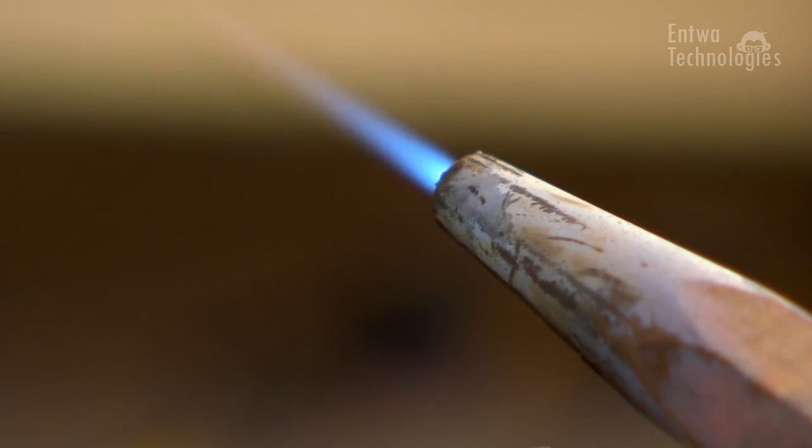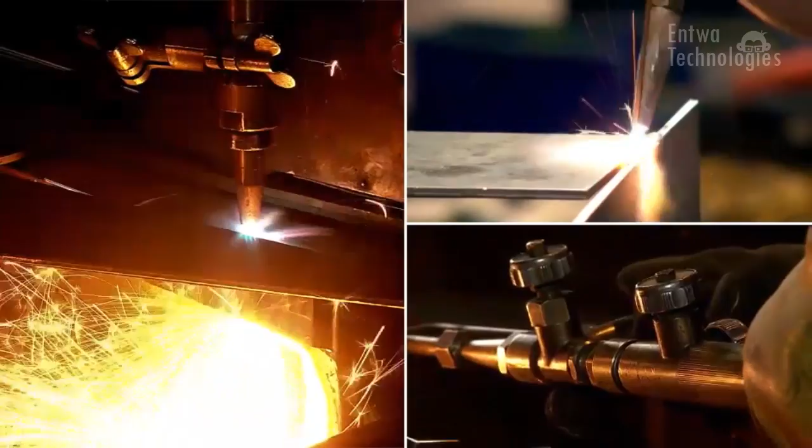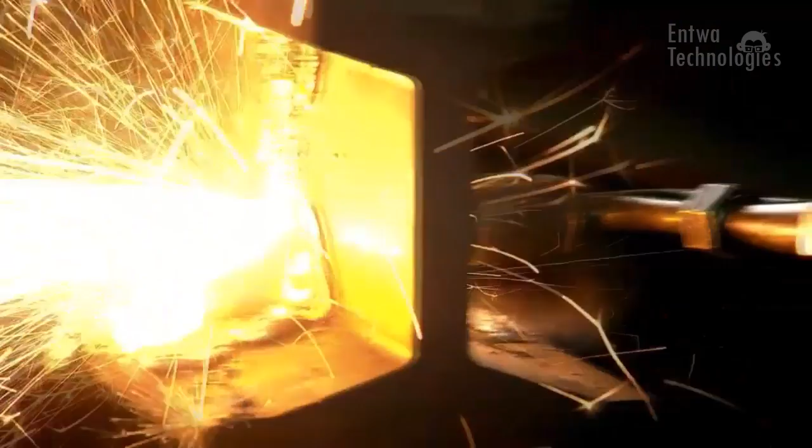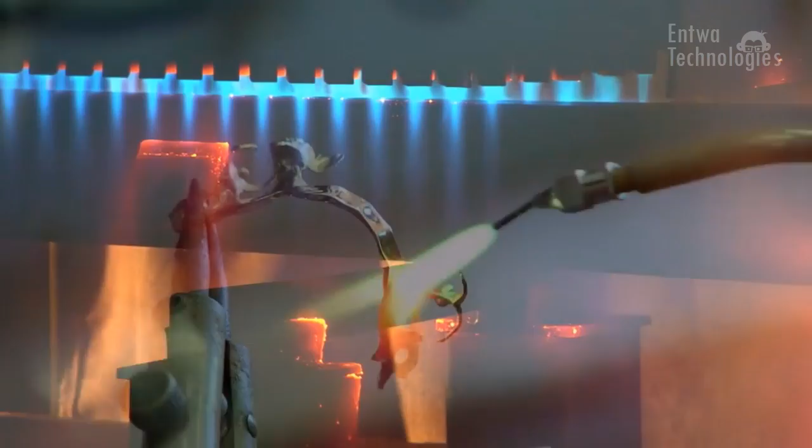Industrial gases used for industrial applications consist of flammable gases along with oxygen. This indispensable combination is used for applications such as welding and cutting, heating, forming, hardening or surface treatment, and for many such applications. Fuel gases such as acetylene and ethylene, propane and propylene, butane or methane or hydrogen mixed with oxygen have proven their value and are safe when handled correctly.

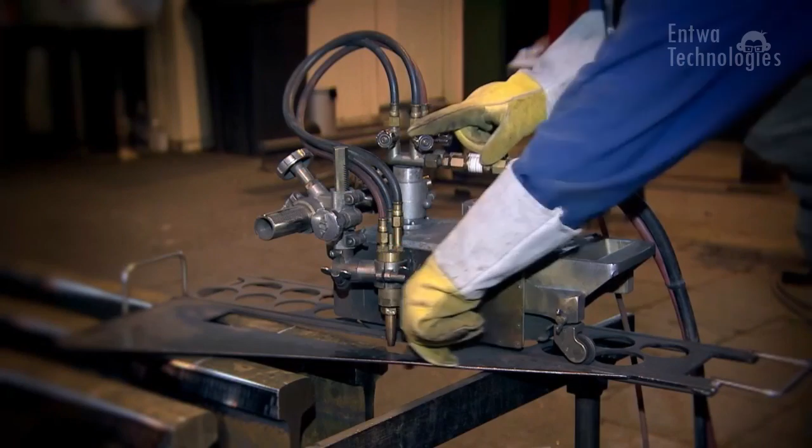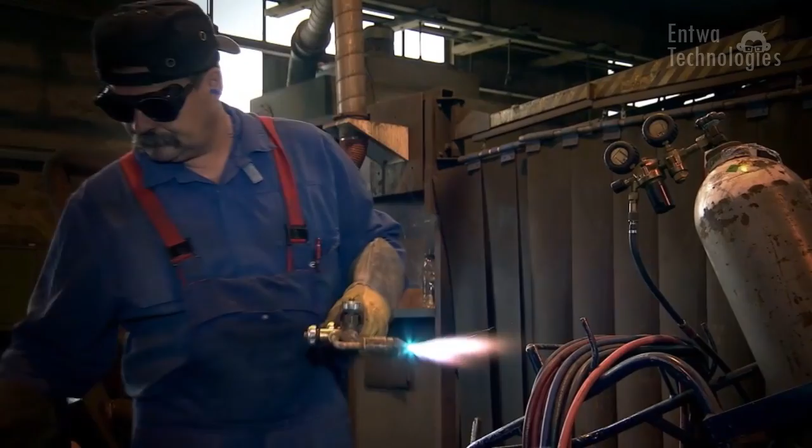However, if these gases are not handled properly, a dangerous situation can arise at any time, mainly due to faulty operations and human error, besides technical faults. For example, in the event of a flashback, the flame travels through the gas hose at twice the speed of sound, thus making it impossible to intervene manually and prevent the accident. The worst case scenario: explosion of the compressed gas cylinder or a gas tank.

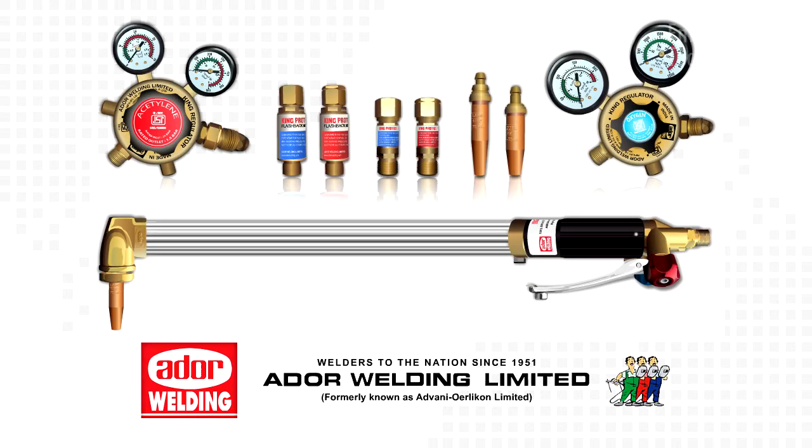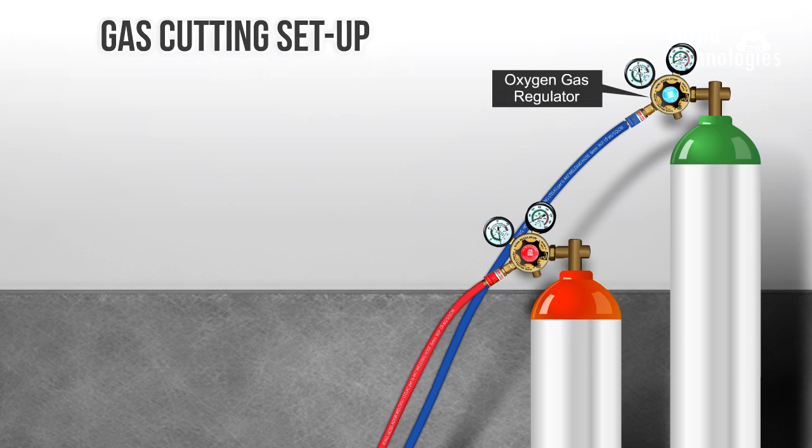Shown is a gas cutting setup with AWL's King series of products. It consists of 2 gas cylinders, one with oxygen and the other contains a fuel gas such as acetylene or LPG. There is an oxygen gas regulator and a fuel gas regulator paired with regulator mounted flashback arresters. The gas hoses for oxygen are demarcated by blue, while red color indicates fuel gas hose.

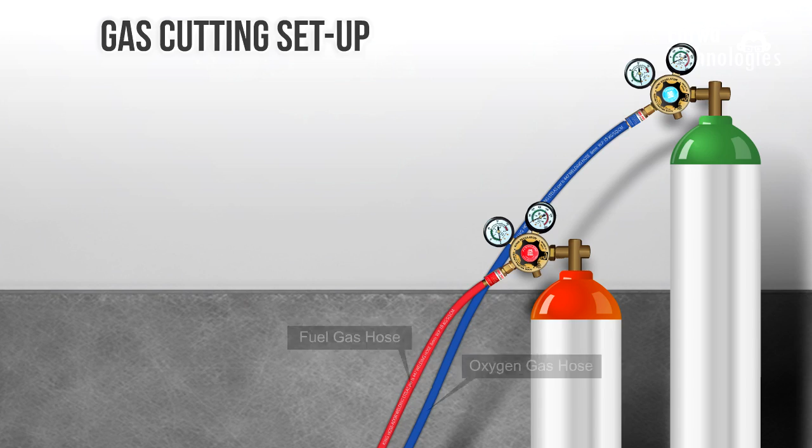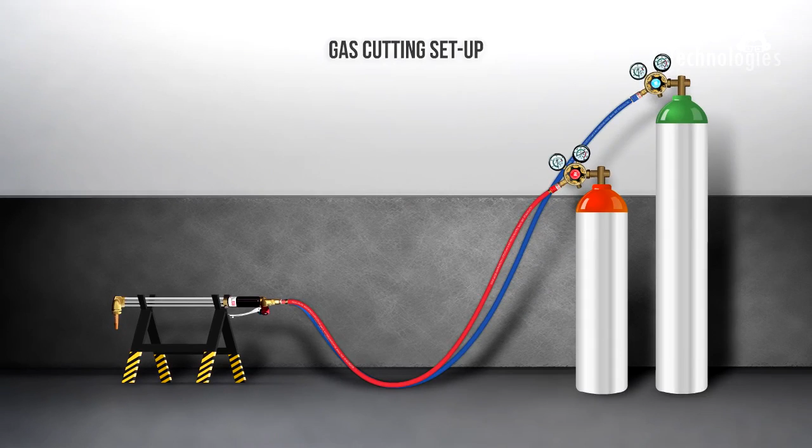This setup also consists of a pair of torch-mounted flashback arresters for both oxygen and fuel gas and also includes a gas-cutting torch. Let us understand in brief about AWL's King series of products with its unique features for enhanced safety.

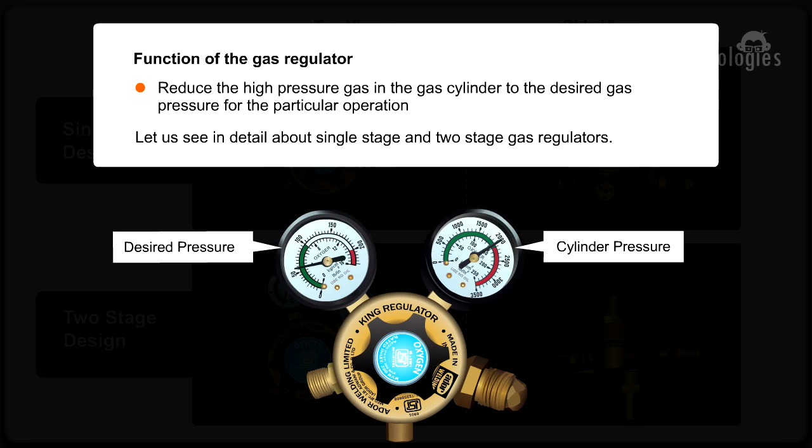An oxygen gas regulator, either of single-stage or 2-stage design, is fitted to an oxygen gas cylinder. Similarly, either acetylene or LPG gas regulator is fitted to the gas cylinder depending upon fuel gas used. The function of a gas regulator is to reduce the high pressure in the gas cylinder to the desired pressure for the particular operation. Let us now see in detail about single-stage and 2-stage gas regulators.

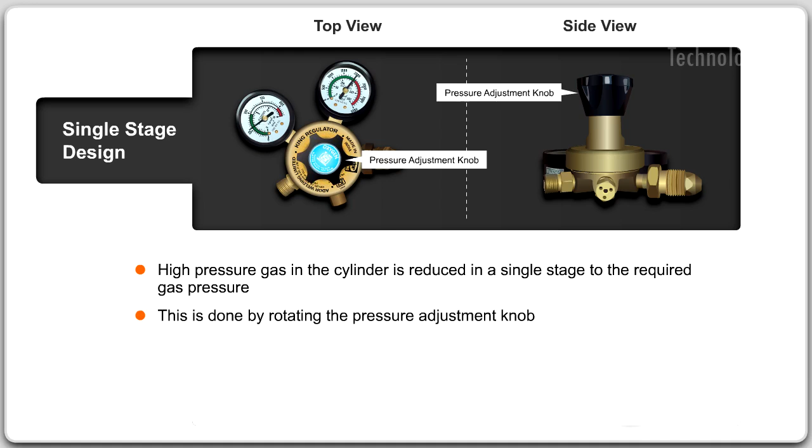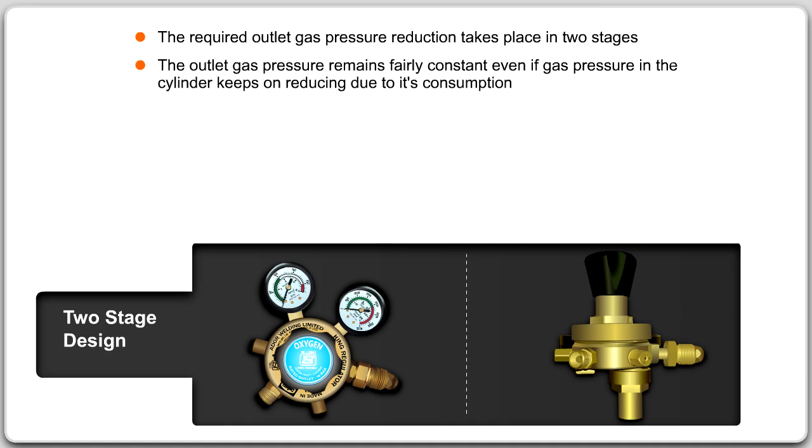In single-stage regulators, high pressure gas in the cylinder is reduced in a single stage to the required gas pressure. This is done by rotating the pressure adjustment knob. In two-stage gas regulators, the required outlet gas pressure reduction takes place in two stages. The outlet gas pressure remains fairly constant even if gas pressure in the cylinder keeps on reducing due to its consumption, as some amount of gas at fixed intermediate pressure is always available in the first stage of the regulator.

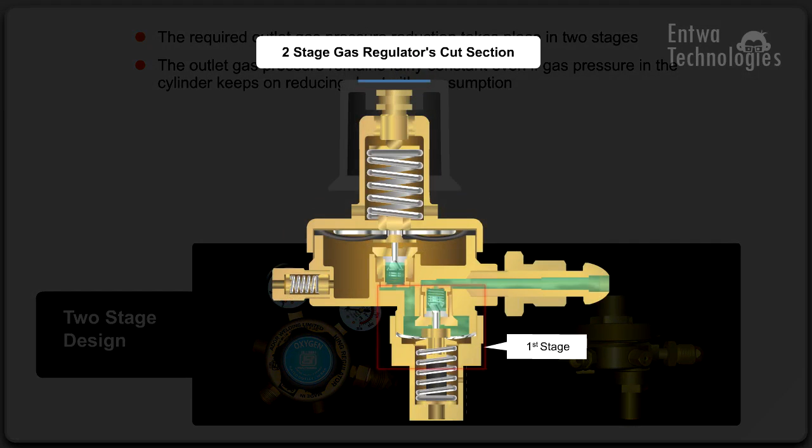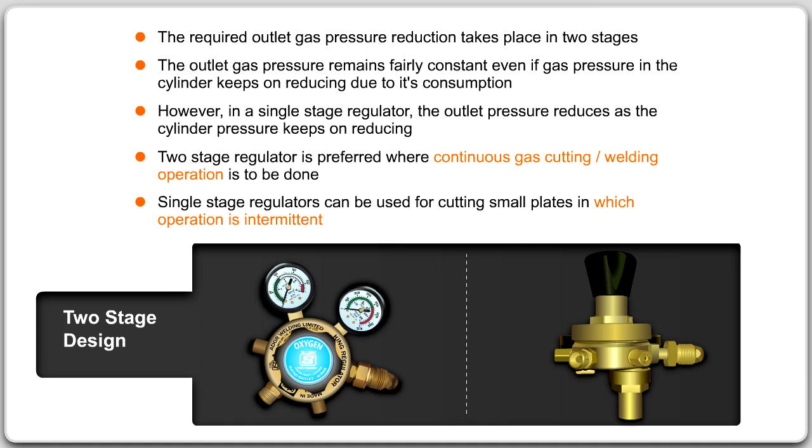However, in a single-stage regulator, outlet pressure reduces as the cylinder pressure keeps on reducing due to gas consumption. Hence, two-stage regulator is preferred where continuous gas cutting or welding operation is to be done. Single-stage regulators can be used for cutting small plates in which operation is intermittent. Let us have a look at the working principle of the single-stage gas regulator.

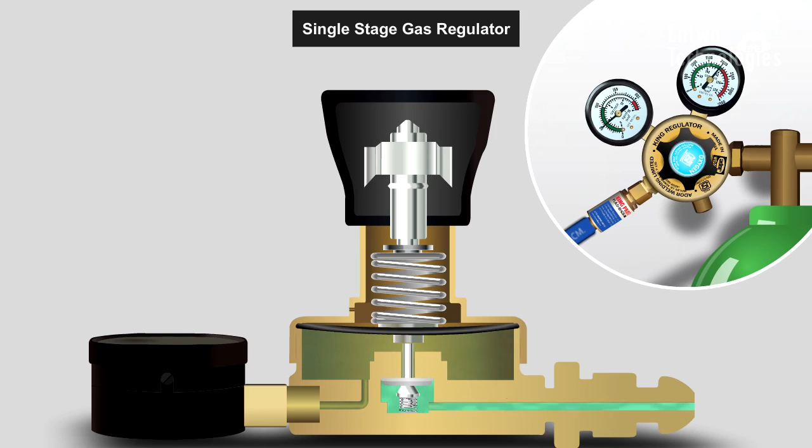When the outlet chamber is filled with gas, it exerts a force, that is, pressure, on the flexible rubber diaphragm, which in turn closes the path of gas flow by moving the valve spindle upwards. This functionality helps prevent extreme gas pressure in the outlet chamber. This happens continuously in the regulator, and hence the rubber diaphragm keeps moving up and down during use.

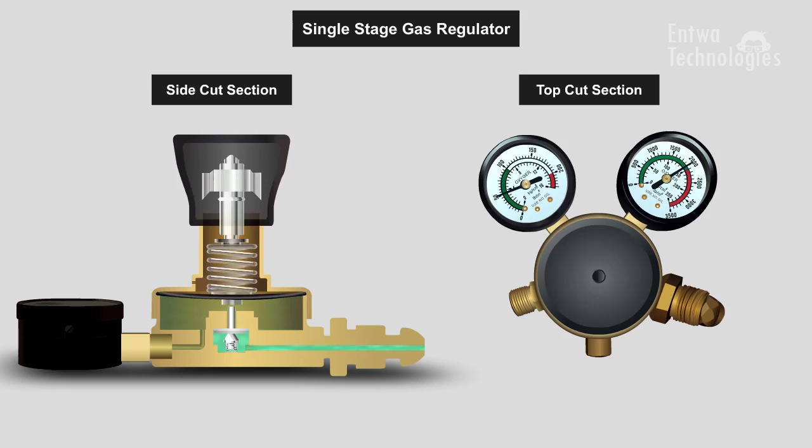Because of such continuous up and down movement, a plain rubber diaphragm used in local make regulators may rupture. If the diaphragm ruptures, gas will leak from the side holes of the bonnet. If the leaked gas is fuel gas, it may catch fire.

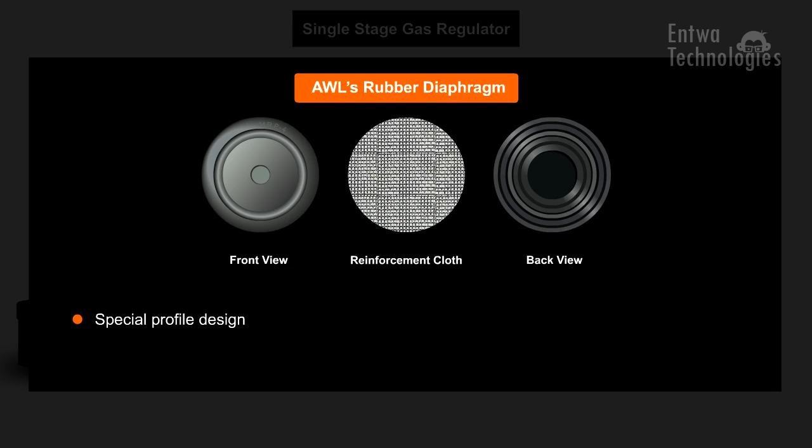The diaphragms used in AWL's King series regulators are of a special profile design, molded with reinforced cloth inserted in between the rubber for extra strength and durability, which works continuously without rupturing.

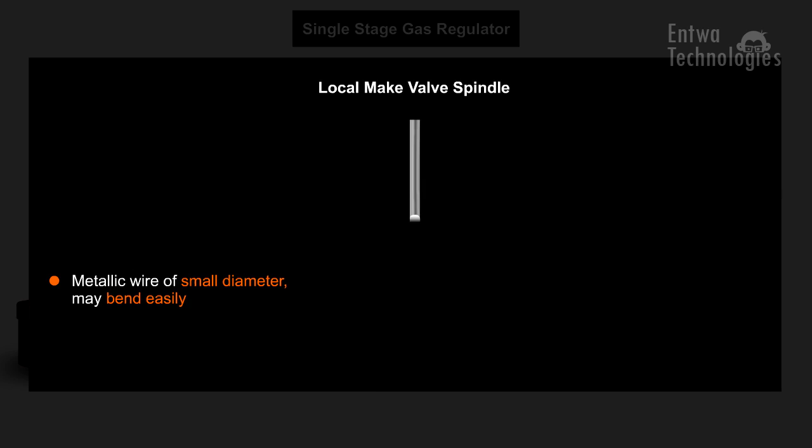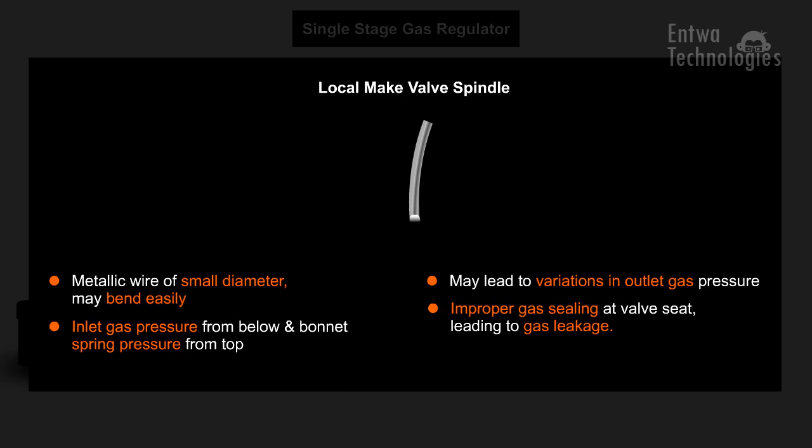The valve spindle used in local make regulators has a metallic wire of small diameter. Hence it may bend easily due to inlet gas pressure from below and bonnet spring pressure from top, and also due to its continuous up and down movement. Bending of this valve spindle may lead to variations in outlet gas pressure, resulting in improper gas sealing at the valve seat, thus leading to gas leakage.

The valve spindle used in the King series of AWL regulators is heavy-duty in nature and made of stainless steel material. It has a precision-polished surface for proper gas on-off control and gas sealing.

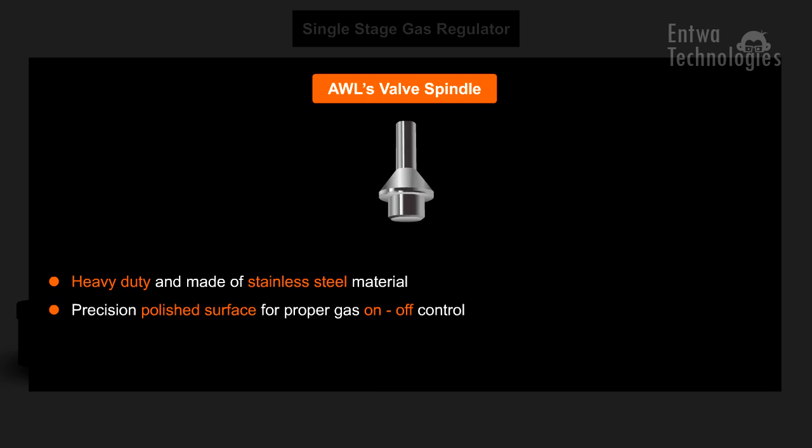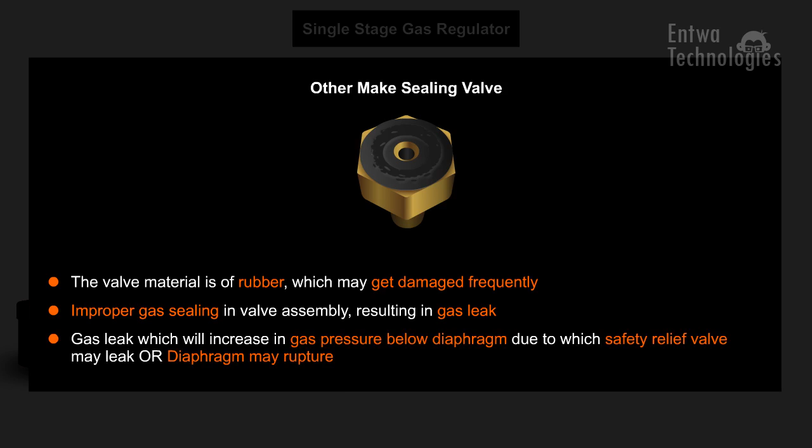The valve material used in other make regulators is rubber, which may get damaged frequently. This may lead to improper gas sealing in the valve assembly, thus resulting in gas leak, which will increase gas pressure below the diaphragm, due to which the safety relief valve may leak or the diaphragm may rupture.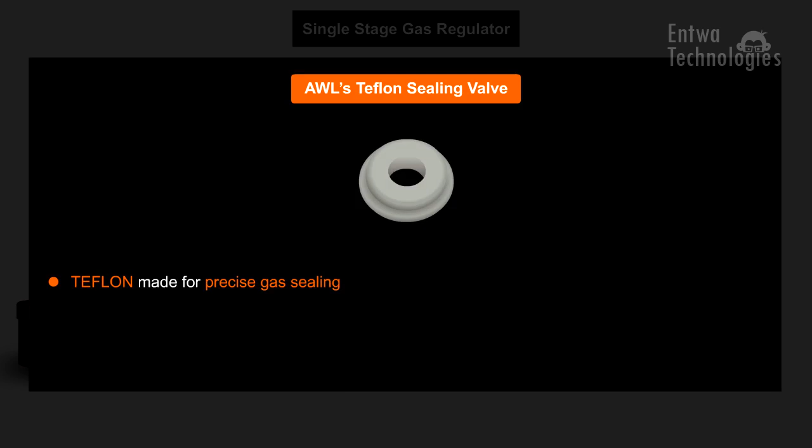The King series of AWL regulators uses Teflon make sealing valves for precise gas sealing. Also, the gas outlet of the King regulators is downwards. This prevents the gas hose from bending, thereby increasing the life of the hose. However, the gas outlet in most other make regulators is horizontal to the ground, due to which the gas hose gets cracked easily.

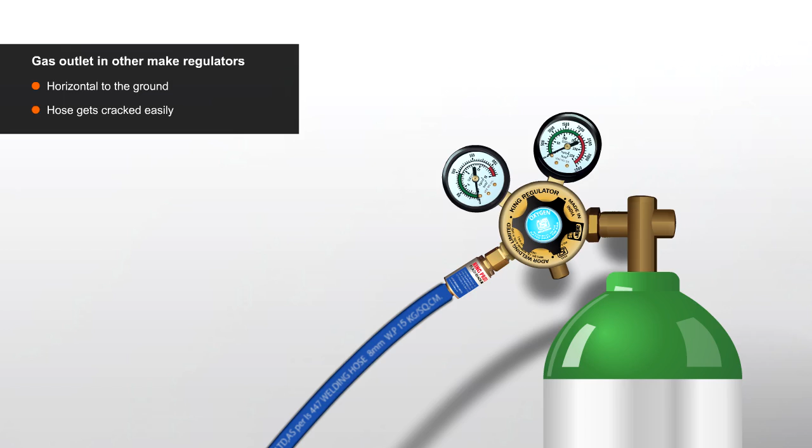All these special features of the AWL Make King regulator make it safe, more durable, reliable and trouble-free. This is about the functioning of the regulator.

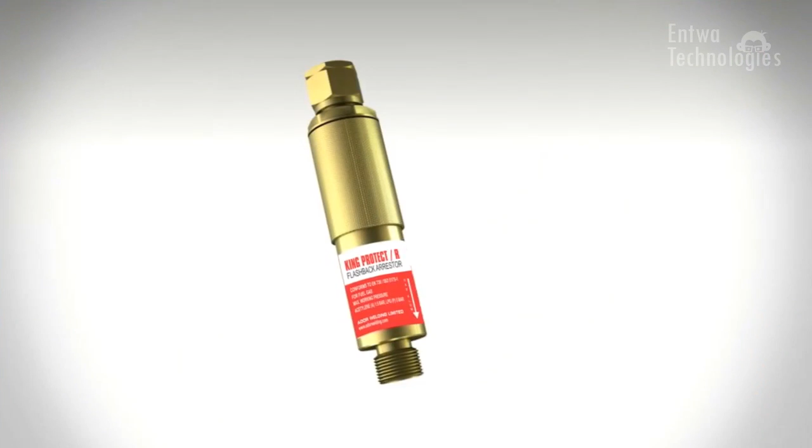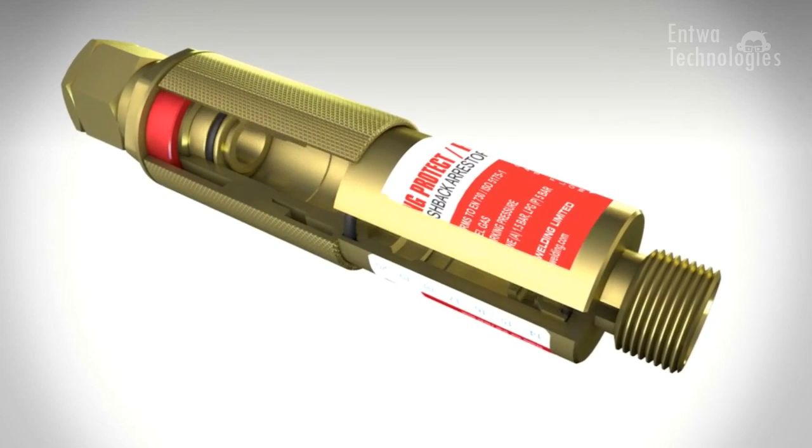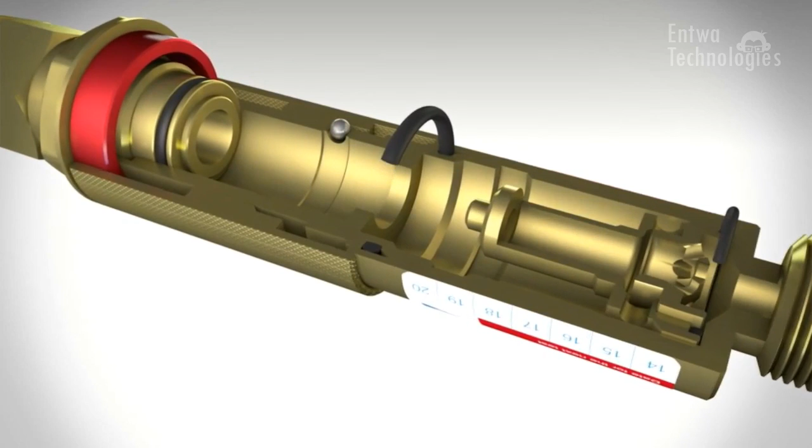Now let's see the features of King Protect Flashback Arresters. A regulator mounting type flashback arrestor fitted on the outlet of the regulator is a multi-stage protection system based on a dry type flashback arrestor that stops the backfire or flashback of gases. The role of a flashback arrestor is to provide protection against such catastrophic failures. Flashback arresters have revolutionized accident prevention with fuel gases and are widely used all over the world today.

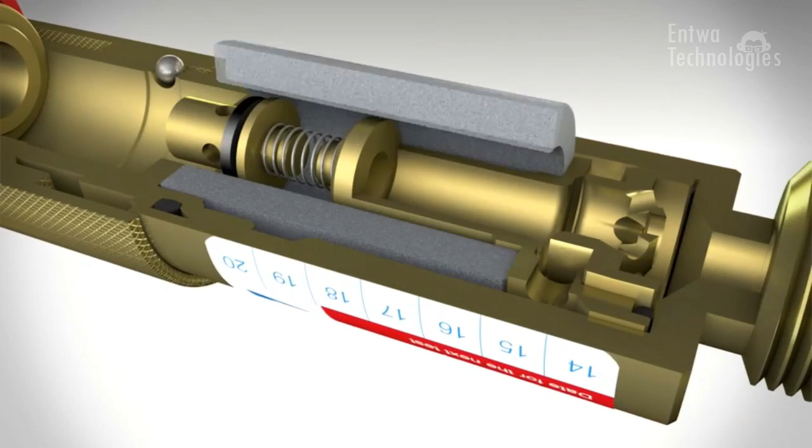A modern quality flashback arrestor of Ador Welding Limited has at least three protection elements, that is, layers: a gas non-return valve, a flame arrestor, and a temperature-sensitive cutoff valve. Let us now understand the flashback arrestor in more detail.

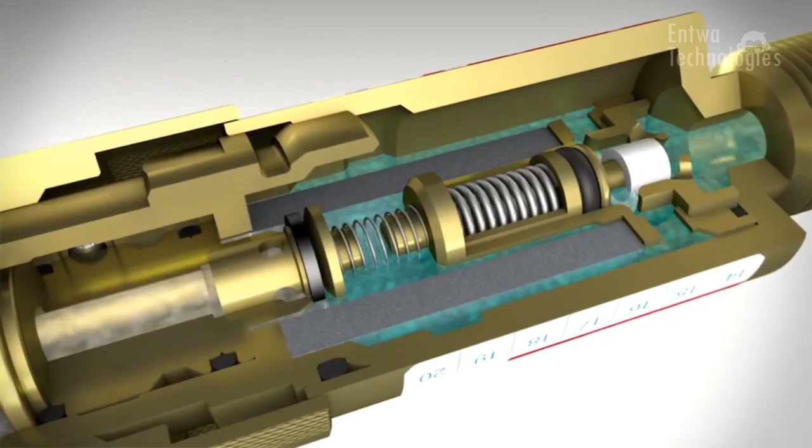If a hazardous situation arises due to an unwanted gas flow through the gas hose, the spring-loaded non-return valve comes into action. It stops the return flow instantaneously, thereby preventing the formation of an explosive gas mixture.

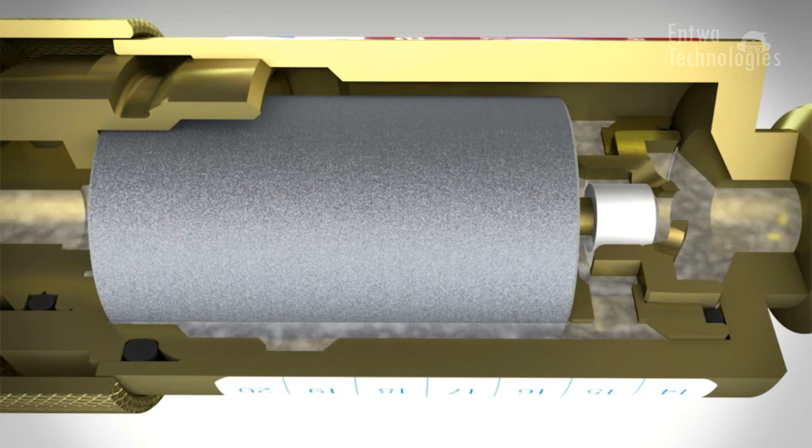On the other hand, if a flashback occurs, it is stopped immediately by the key element of the flashback arrestor, the hollow cylinder filter made from sintered chrome-nickel steel. Only with this technology can flames from the flashback be prevented.

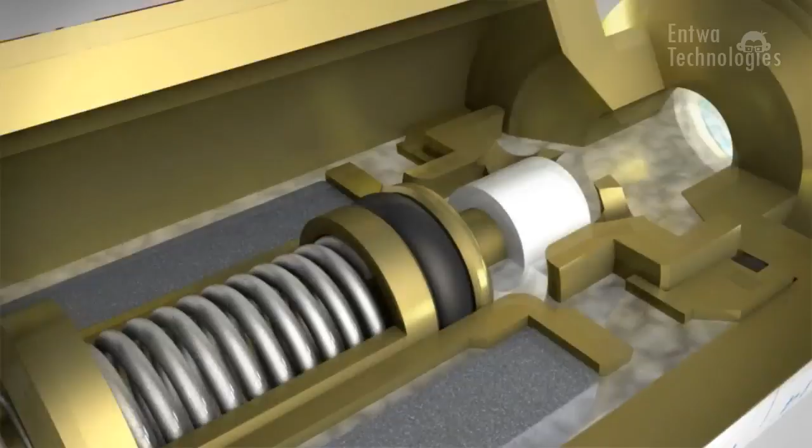This outstanding technical feature is based on a highly porous structure of the cylinder filter. Incoming flames break up into an extended labyrinth, thereby losing their energy in cooling, thus extinguishing flames in a fraction of a second. The temperature-sensitive cutoff valve is the third important protection element.

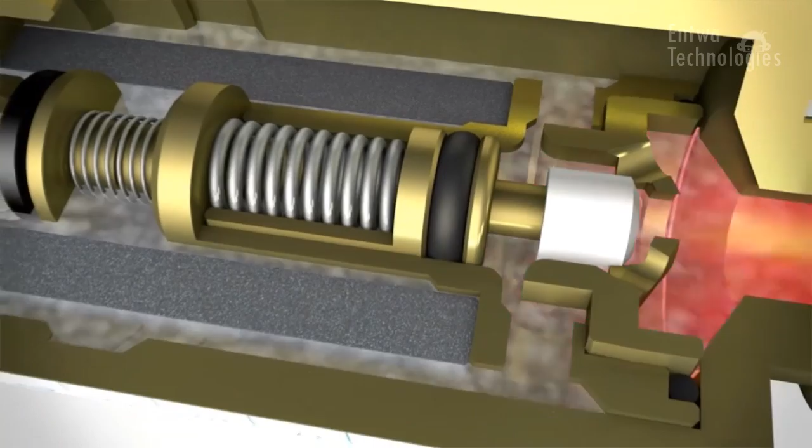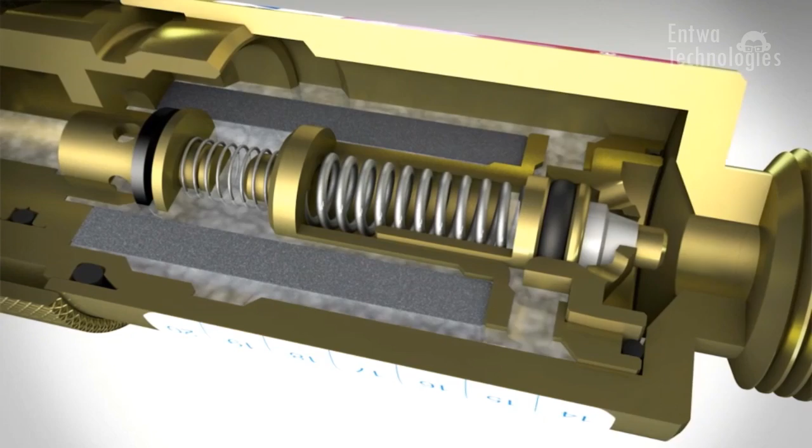Its integrated plastic body melts, and the spring-loaded valve triggers before the device can heat dangerously. This automatic interruption of the gas supply prevents gases from reaching critical ignition temperature at the gas inlet.

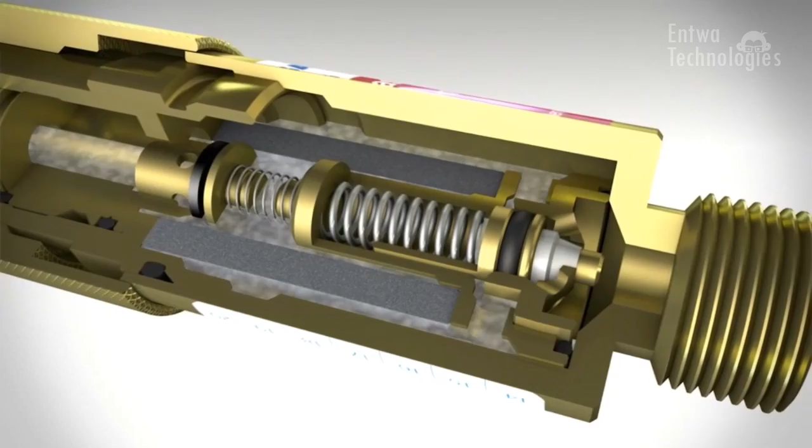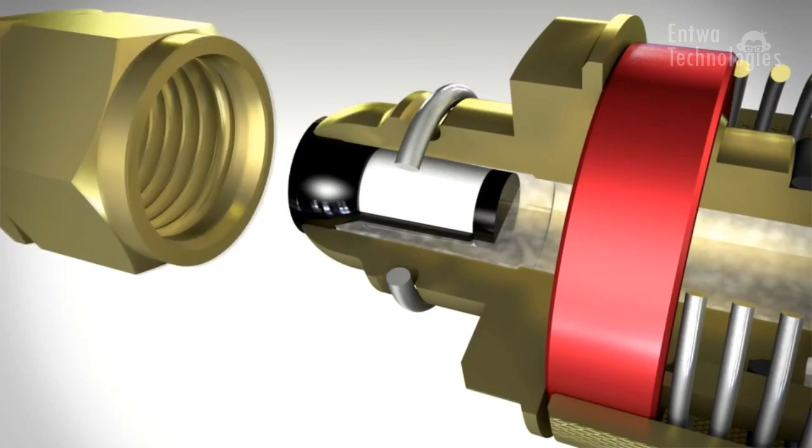Dangerous backburning is stopped at a source, ensuring complete safety. Filters in the gas inlet protect the flashback arrestor against dirt. Flashback arrestors from Ador Welding Limited are compact and robust, and can be installed anywhere irrespective of orientation.

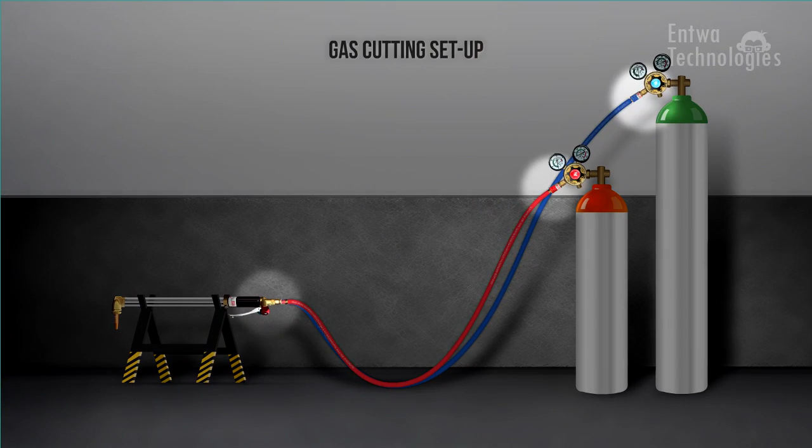It is highly recommended to fit flashback arrestors at the outlet of regulators and at the inlet of torches for operator and equipment safety in case of backfire or flashback. In many countries, this is a statutory requirement by law.

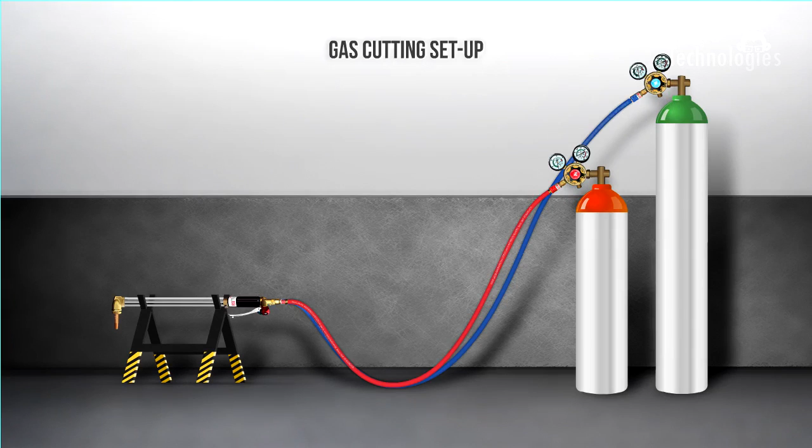AWL's King hoses are especially designed and manufactured for gas cutting and welding applications and are robust enough to withstand rough shop floor conditions. These are manufactured with high tensile reinforced yarn. Safe working pressure of King hose is 15 bar, and it does not bulge until the working pressure exceeds 15 bar.

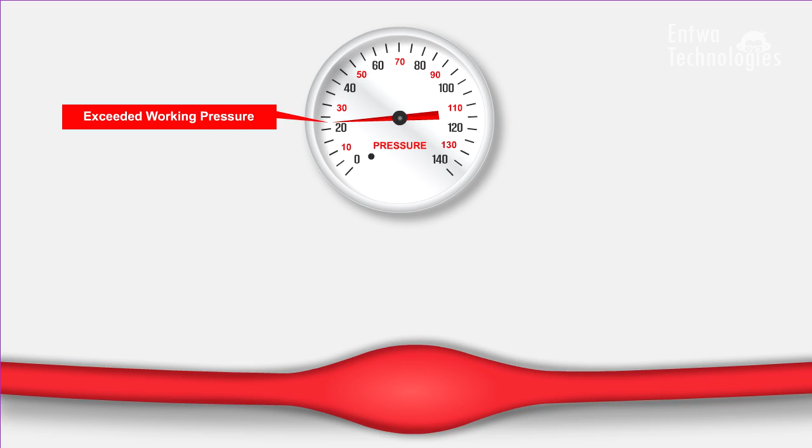Similarly, it has a minimum bursting pressure of 55 bar, and therefore does not burst until the gas pressure exceeds 55 bar.

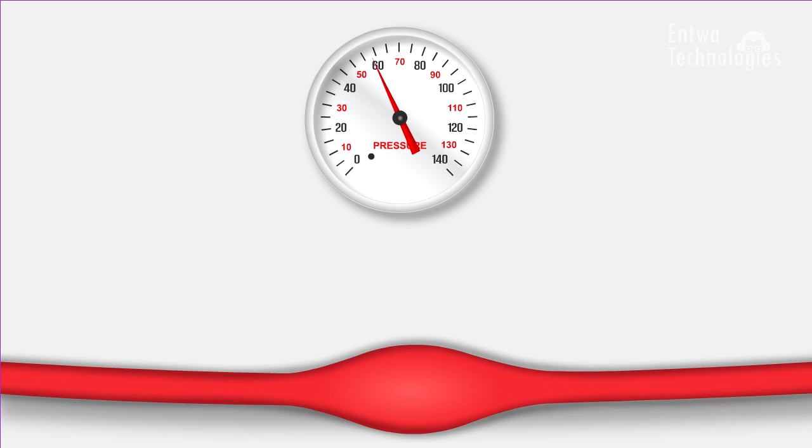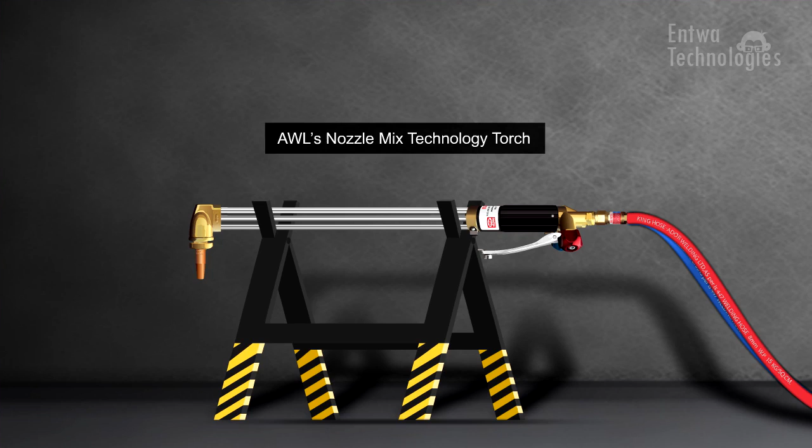Now let us see the features of AWL's gas cutting torch. These torches are also called blowpipes by some users.

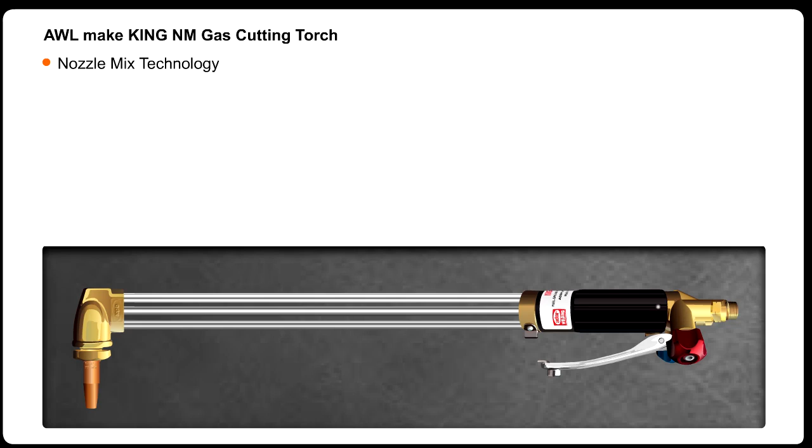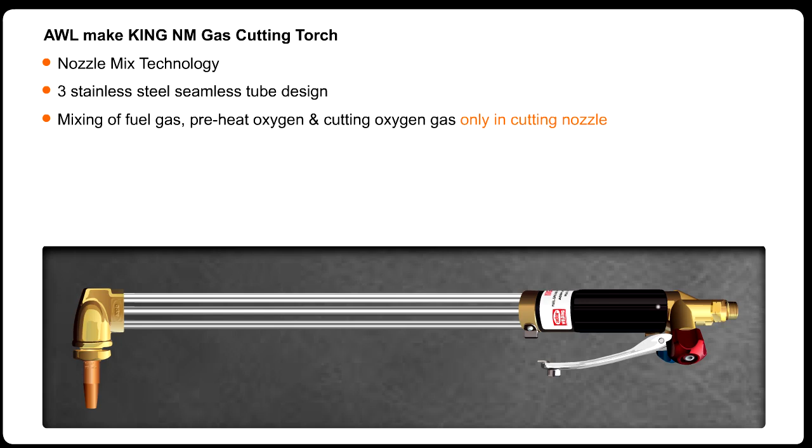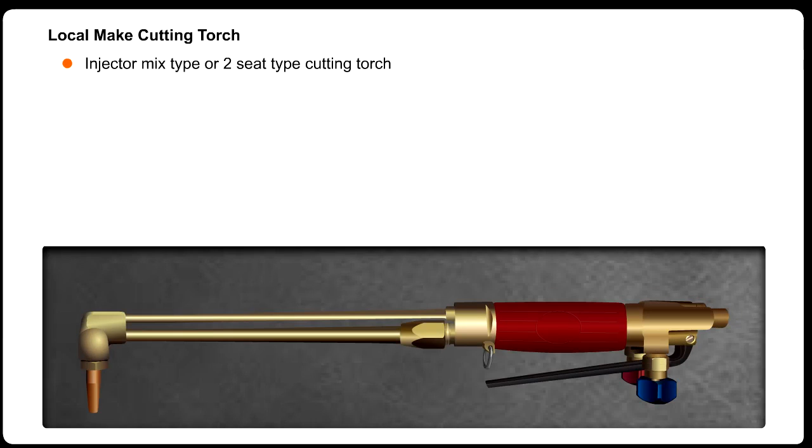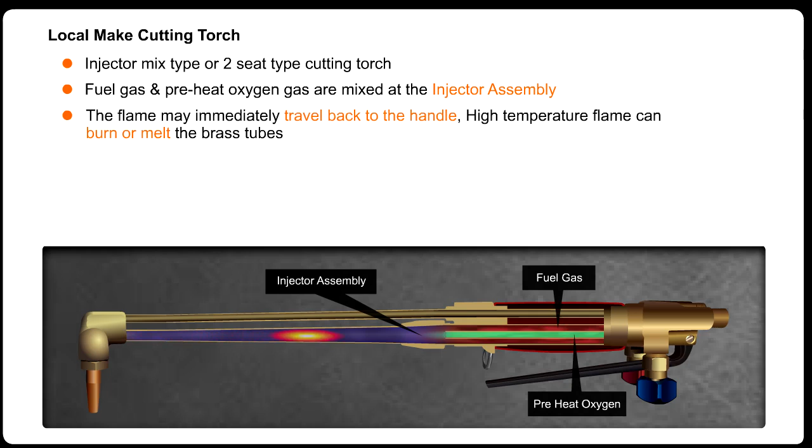AWL make King NM gas cutting torches have a unique nozzle mix technology with a 3 stainless steel seamless tube design for mixing fuel gas, preheat oxygen, and cutting oxygen gas. These gases are mixed only in the cutting nozzle. However, in local make cutting torches, called injector mix type or 2-seat type cutting torch, the fuel gas and preheat oxygen gas are mixed in an injector assembly near the handle of the torch. Hence, in case of backfire or flashback, the flame may immediately travel back to the handle, and the high temperature flame can burn or melt the brass tubes of the torch, leading to fatal injury to the operator. This situation is avoided by using AWL's nozzle mix technology torches.

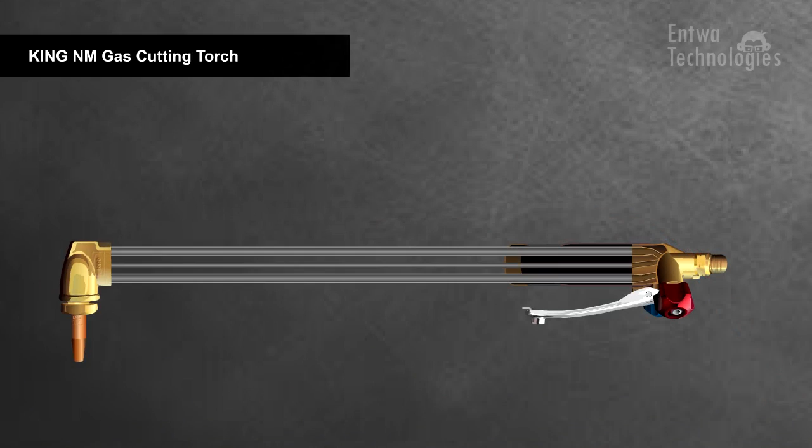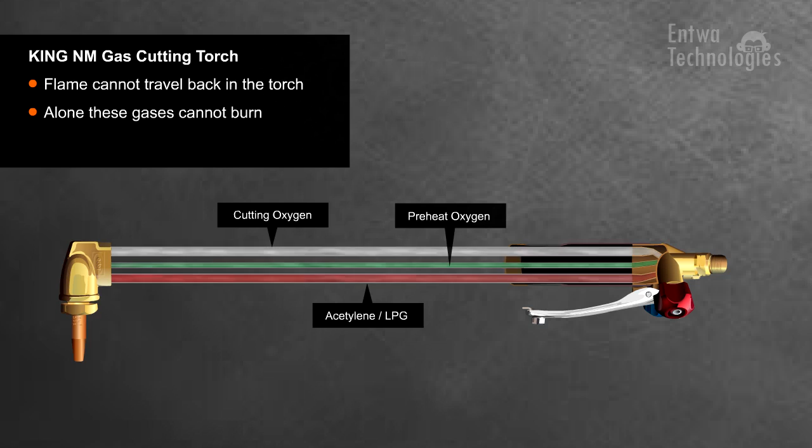Let us understand the functioning of the King NM gas cutting torch. Fuel gas such as acetylene or LPG flows in the lowermost tube. Preheat oxygen flows in the middle tube, and cutting oxygen flows through the uppermost tube. Due to this, the flame cannot travel back in the torch, as there are 3 separate tubes for each gas, and alone these gases cannot burn. This translates into high safety for the user.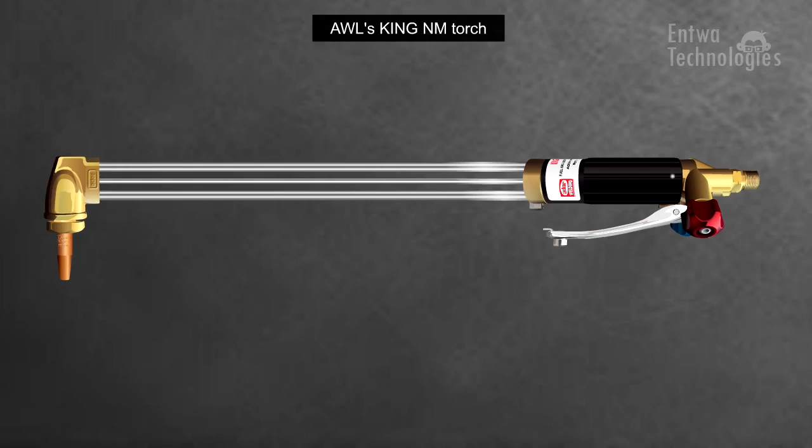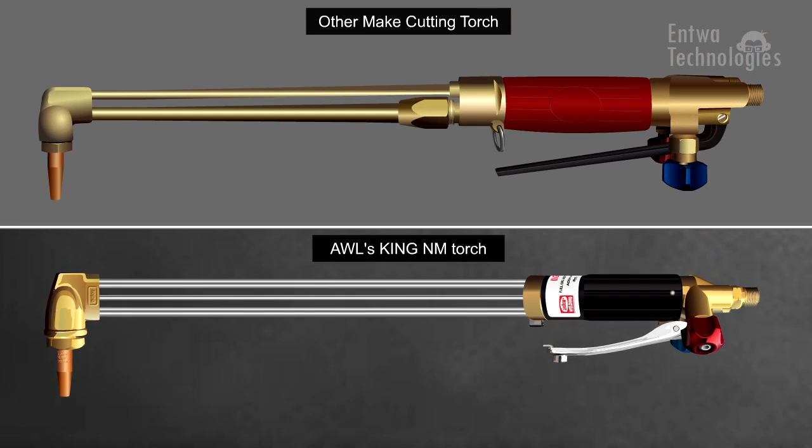Similarly, the King NM cutting torch is all metallic from outside to withstand rough shop floor conditions. Whereas in other makes, such as 2-seat type cutting torches, the gas control knobs and handle are made of non-metallic materials, resulting in frequent breakdown and hence frequent maintenance.

The inlet coupler in the King NM cutting torch is a separate removable component which can be replaced if its threads get damaged. However, in local make cutting torches, inlet threads are integrated into the torch body, hence the whole brass body needs to be replaced if the inlet threads get damaged.

In the King NM torch, all 3 stainless steel tubes are silver brazed at both ends, hence there is no chance of gas leakage from these joints. Whereas in other make cutting torches, one end of both brass tubes has a threaded connection, which increases chances of gas leakages from these threaded joints.

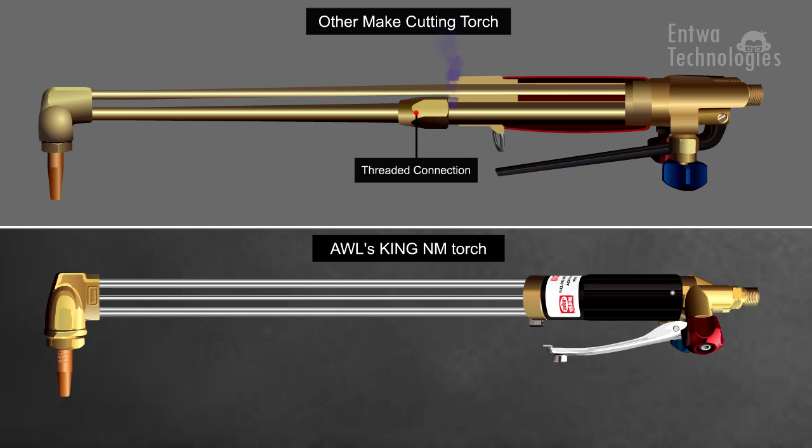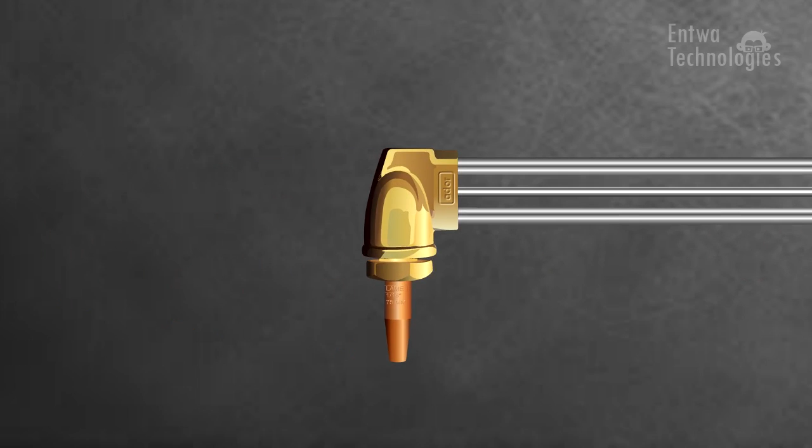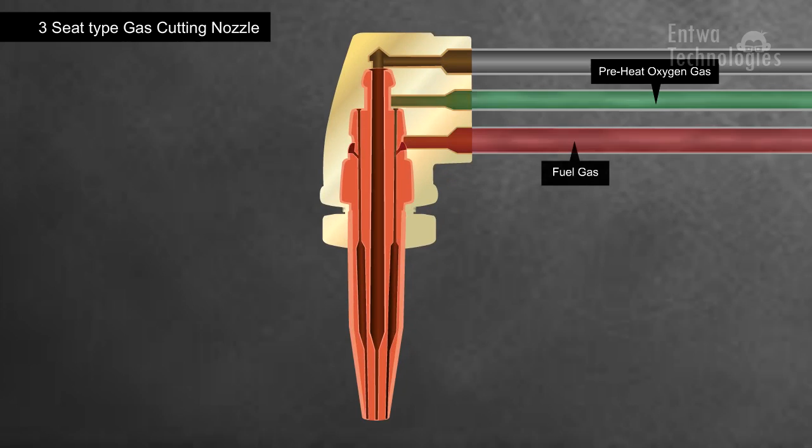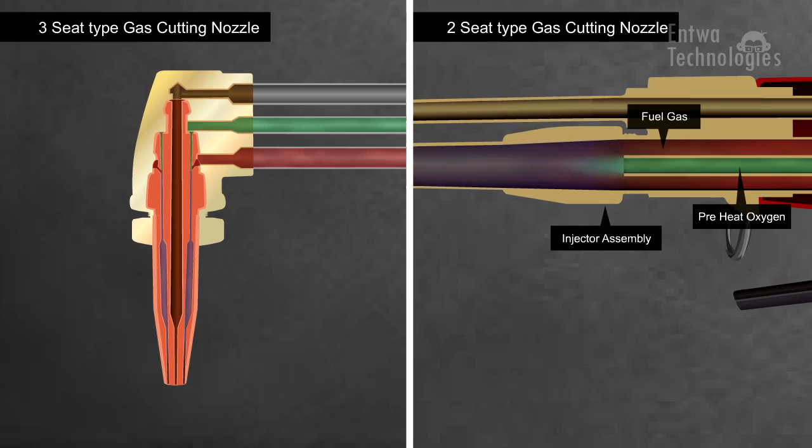After understanding the torch, now let's get a brief about the gas cutting nozzle. AWL offers a highly safe 3-seat type gas cutting nozzle with NM technology. In 3-seat type nozzle, mixing of preheat oxygen gas and fuel gas happens inside the nozzle, whereas in 2-seat type cutting nozzle, mixing of gases takes place in the injector assembly fitted in the cutting torch.

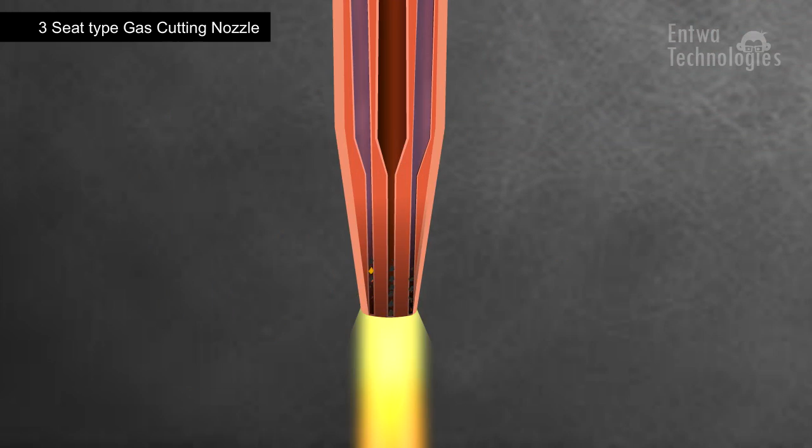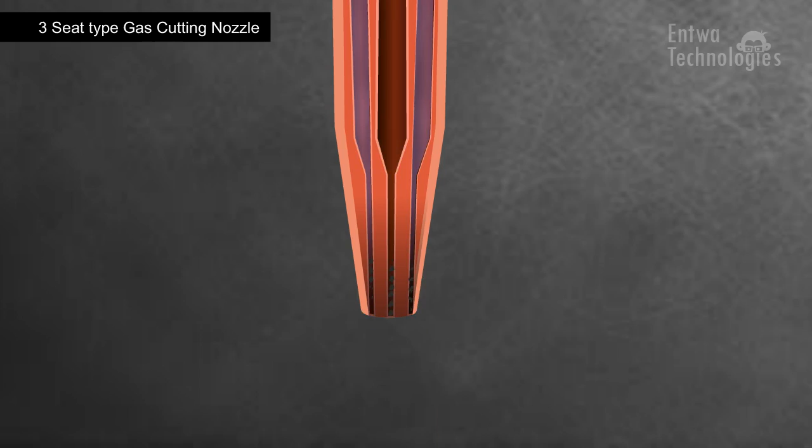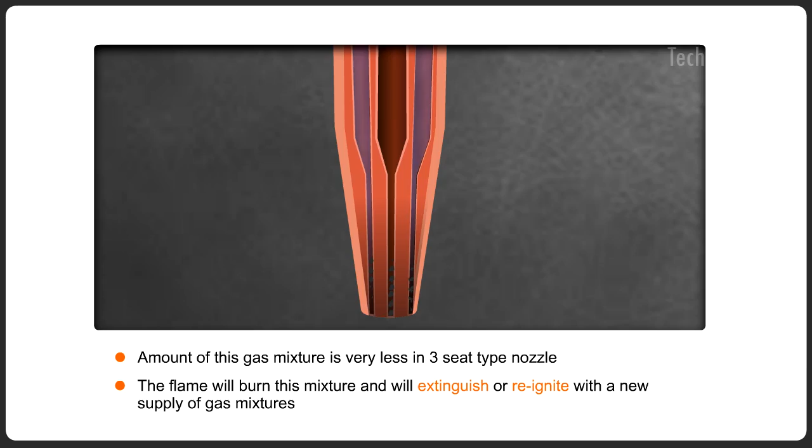The benefit of this NM technology is that if the nozzle holes get blocked due to molten metal clogging, the flame will not be able to come out of the nozzle. This results in the flame traveling back and burning the gas mixture inside the nozzle. Since the amount of this gas mixture is very small in 3-seat type nozzle, the flame will burn this mixture and extinguish or reignite with a new supply of gas mixture. However, in 2-seat type nozzle, the flame may travel back up to the cutting torch and further up to the regulator, leading to a hazardous situation.

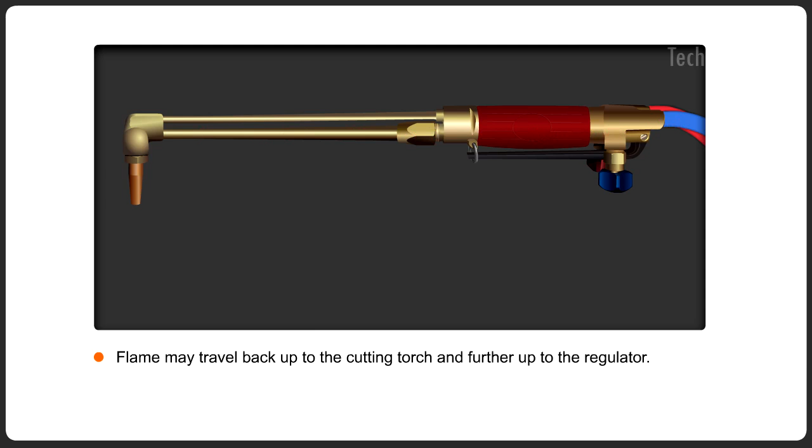This re-emphasizes and establishes Ador Welding Limited as a market leader and the most respected brand in the welding fraternity, making it a naturally preferred choice for complete welding and cutting solutions.